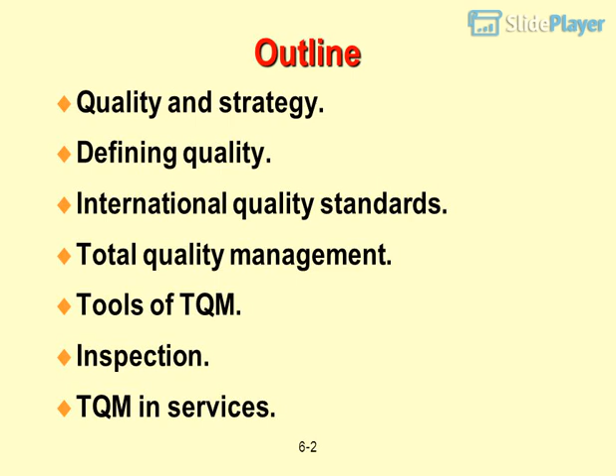International Quality Standards, Total Quality Management, Tools of TQM, Inspection, TQM in Services.

Reduced costs come from increased productivity, lower rework and scrap costs, and lower warranty costs.

This slide not only looks at the impact of quality on productivity, it also enables you to begin a discussion as to the meaning of quality, or perhaps the differing meanings among different people. To many people, the notion of high quality carries with it the assumption of high price. This slide provides an initial point to challenge that assumption.

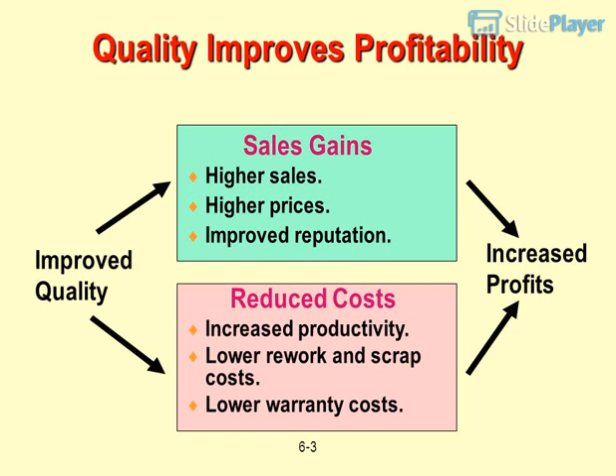Definitions of quality: totality of features and characteristics that bears on a product or service's ability to satisfy customer needs, according to the American Society for Quality. User-based: what the consumer says it is.

Manufacturing-based: degree to which a product conforms to design specification. Once you have introduced these definitions of quality, ask students to provide examples of products that use them.

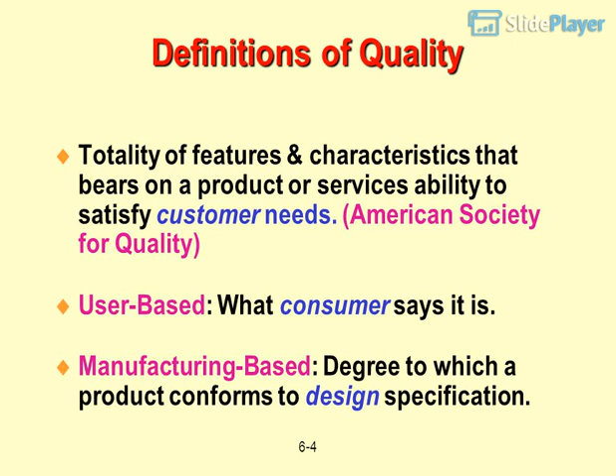Dimensions of quality for goods: operation or performance, reliability, durability, conformance, serviceability, appearance to senses.

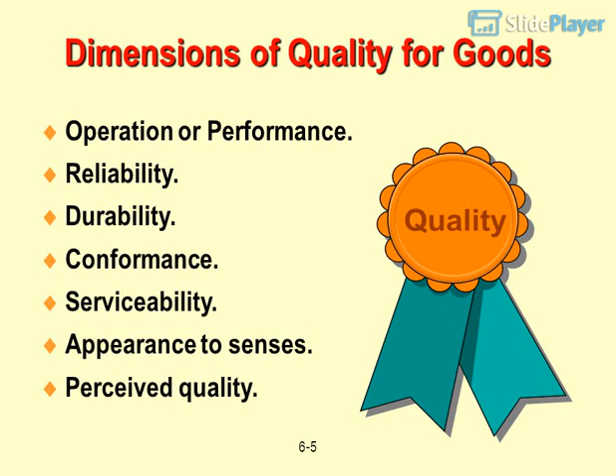Perceived quality. It may be most helpful to provide, or ask your students to provide, examples of products for which the notion of quality is based upon one or more of the dimensions listed.

Implications of quality: company reputation, real or perceived. Product liability, where large dollar amounts can be awarded. Global implications, since company quality affects national image.

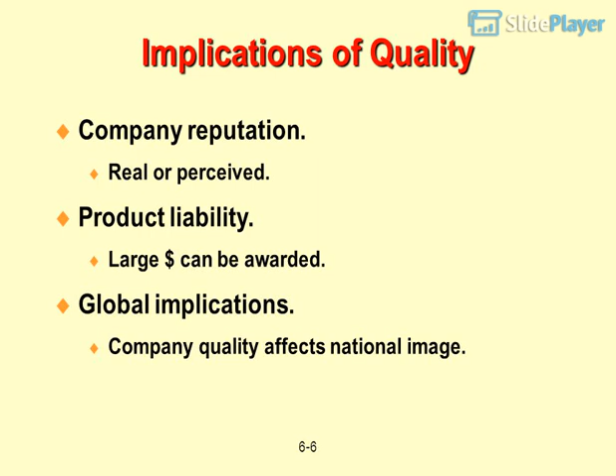International quality standards: ISO 9000 series, Europe/EC, common quality standards for products sold in Europe, even if made in the US.

ISO 14000 series, Europe/EC, standards for recycling, labeling, etc.

One of the most important points to be made from this slide is that quality standards are now international. Students might be asked to explain the benefits of international as opposed to national standards. They might also be asked to consider the limitations we would face if there were no such standards. The problems to be encountered in developing international standards also make for good discussion.

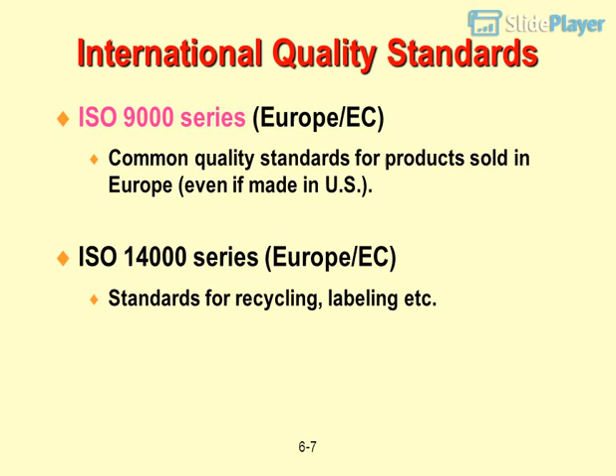Note to your students that Crosby has great reservations about the standard and the procedures for building an effective quality program.

Costs of quality: prevention costs, 5 to 10%, to prevent failures. Appraisal costs, 15 to 40%, to evaluate products. Failure costs, 50 to 80%.

Internal failure costs are defective parts or services discovered in-house. External failure costs are defective parts or services discovered by the customer. Most organizations do not know the cost of poor quality.

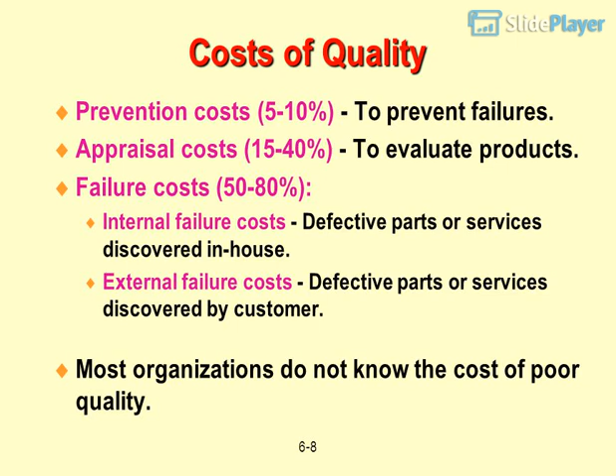Costs of quality: internal failure costs include scrap and rework, downtime, safety stock inventory, and overtime. External failure costs include complaint handling and replacement, warranties, liability, and loss of goodwill.

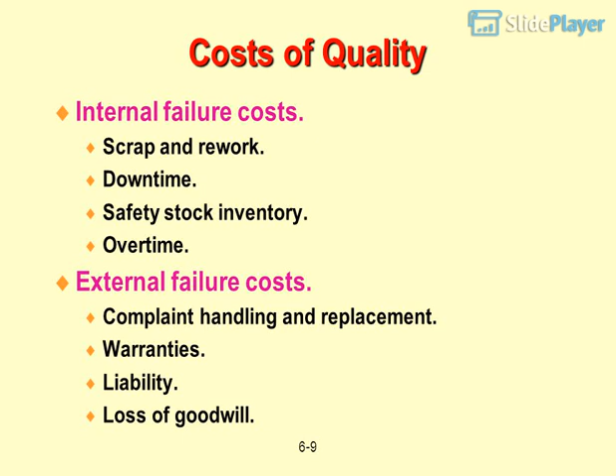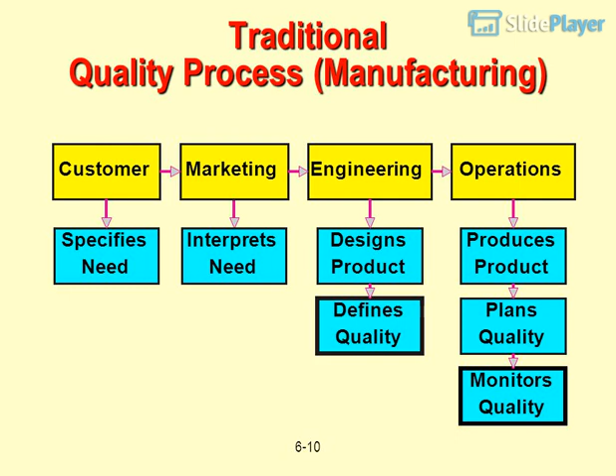Defines, plans. Students might be asked what problems they would foresee in implementing this process. Quality is monitored throughout. This leads into TQM, Total Quality Management.

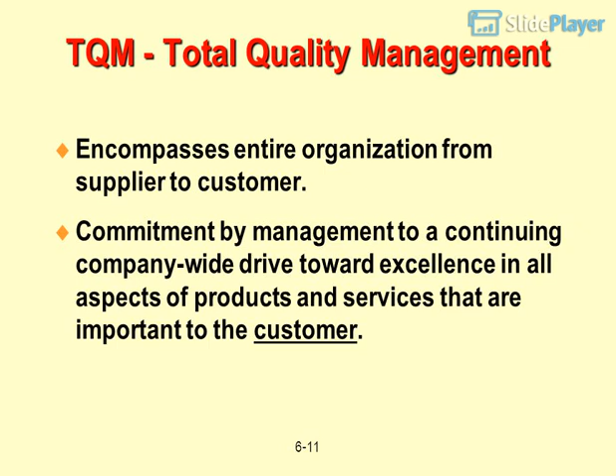TQM encompasses the entire organization from supplier to customer. It is a commitment by management to a continuing company-wide drive toward excellence in all aspects of products and services that are important to the customer. A point to be made here is that TQM is not a program but a philosophy.

Three key figures: W. Edwards Deming, Joseph Juran, Philip Crosby. Management and all employees have a responsibility for quality. Deming's 14 points led to the Deming Prize in Japan.

Joseph Juran focused on the customer and continuous improvement in teams. Philip Crosby argued that quality is free, and that the cost of poor quality is underestimated.

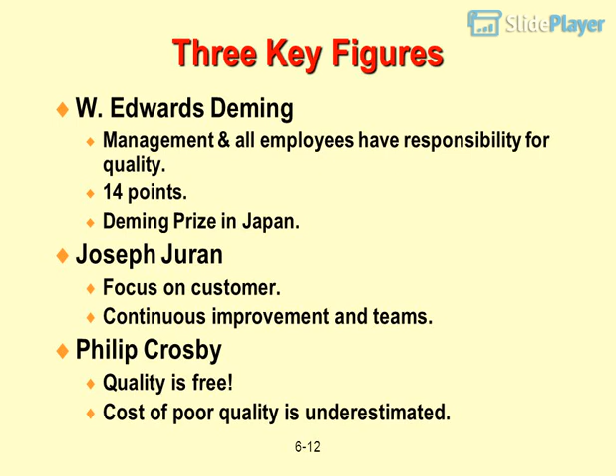If they raise this issue, ask them to consider jobs they have held. Were these points emphasized or implemented by their employers? If not, why not? This part of the discussion can be used to raise again the issue that proper approaches to quality are not programs, with limited involvement and finite duration, but rather philosophies which must become ingrained throughout the organization. Deming's points create consistency of purpose across the organization.

If not, why not? This part of the discussion can be used to raise again the issue that proper approaches to quality are not programs, with limited involvement and finite duration, but rather philosophies which must become ingrained throughout the organization. Malcolm Baldrige National Quality Award.

Established in 1988 by the U.S. government to promote TQM practices. Quality improvement programs are essential to the well-being of our economy and our ability to compete globally.

Criteria include senior executive leadership, strategic planning, management of process quality, quality results, and customer satisfaction. You might make the point that companies actually do consider this a prestigious award. For further information, visit the website

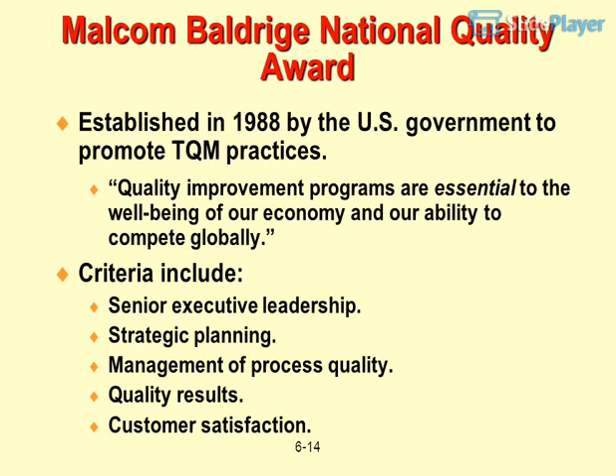http://www.quality.nist.gov. Malcolm Baldrige National Quality Award, Guidelines. It is crucial to have management understanding of the factory floor, worker involvement in quality, and emphasis on statistical process control. Quality improvement programs must be management-led and customer-oriented, and this may require fundamental changes in the way companies and agencies do business.

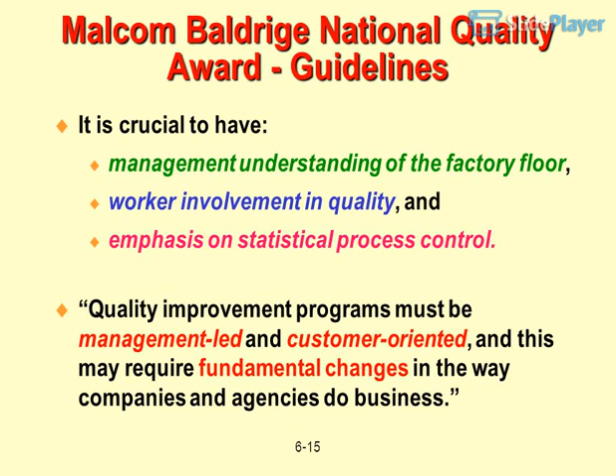You might make the point that companies actually do consider this a prestigious award. For further information, visit the website http://www.quality.nist.gov. Concepts of TQM. Top management has primary responsibility.

Focus on customer. Continuous improvement. Employee empowerment. Benchmarking. Knowledge of tools for TQM. This slide simply introduces concepts of TQM. These concepts are expanded upon in subsequent slides.

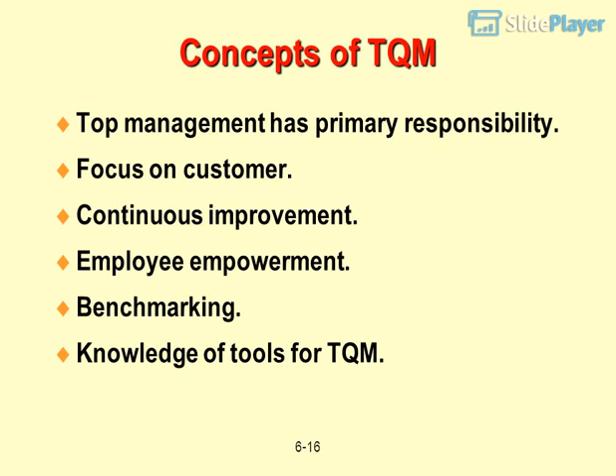Continuous improvement. Continuously improve process and customer satisfaction. Involve all operations and work units. Other names include Kaizen (Japanese), zero defects,

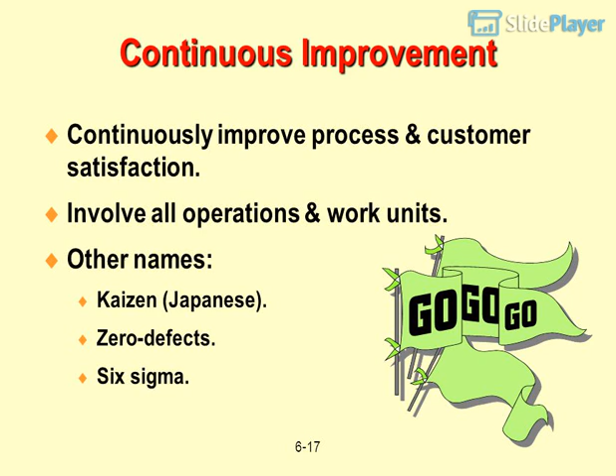Six Sigma. Students may have a number of questions with respect to the notion of continuous improvement. Why do we need continuous improvement? Why can't we do it right the first time? Doesn't implementation of continuous improvement introduce a certain instability? Are we never done?

Employee empowerment. Involve employees in product and process improvements. 85% of quality problems are due to process and material, not employees. Techniques include supporting workers so workers can solve quality problems.

Let workers make decisions. Train workers. Provide tools for improved quality. Build teams and quality circles.

If you have not done so already, you might at this point discuss why employee empowerment works. Consider the role of information technology in enabling employee empowerment, and the role of information technology in making employee empowerment a requirement.

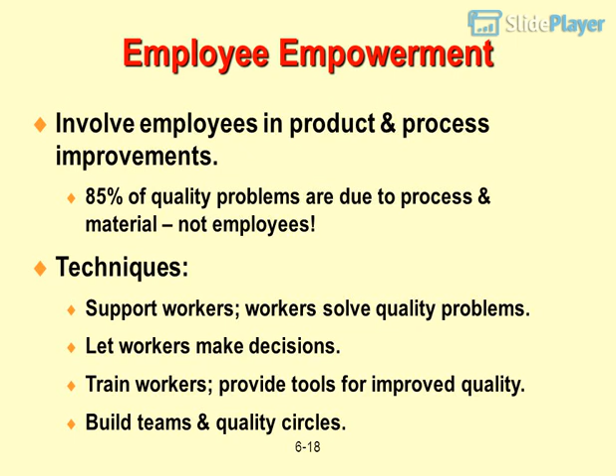Benchmarking. Selecting best practices to use as a standard, or target, for performance. Determine what to benchmark. Consider leading organizations in similar areas. Collect and analyze benchmarking information.

Use quantitative measures of performance. Take action to match or exceed the benchmark. Ask students to identify firms which they believe could serve as benchmarks.

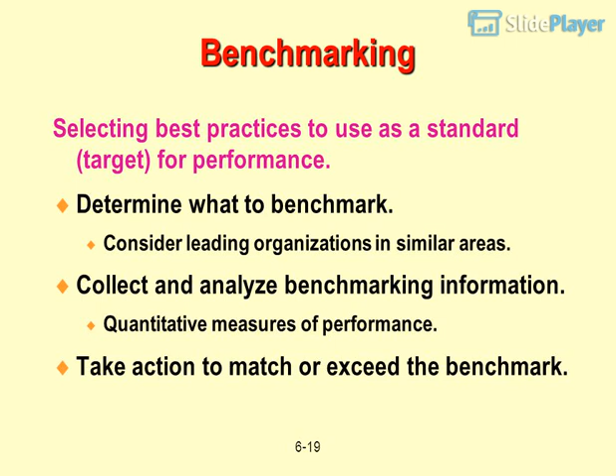If students are unable to identify any firms, ask them to identify a college or university whose registration system or housing selection system could serve as a benchmark. Most students have enough knowledge of, or friends at, other colleges and universities so as to be able to respond to this question. Tools for TQM: Quality Function Deployment, QFD.

Taguchi Techniques. Cause and effect diagrams. Pareto Charts. Statistical process control. Poka-yoke. This slide simply enables you to introduce the tools of TQM. Particular tools are elaborated upon in subsequent slides.

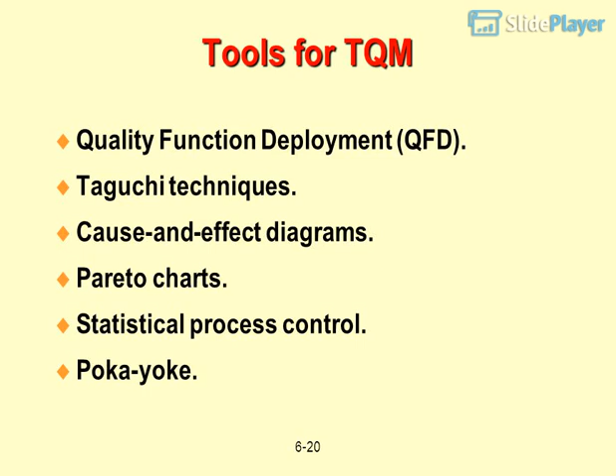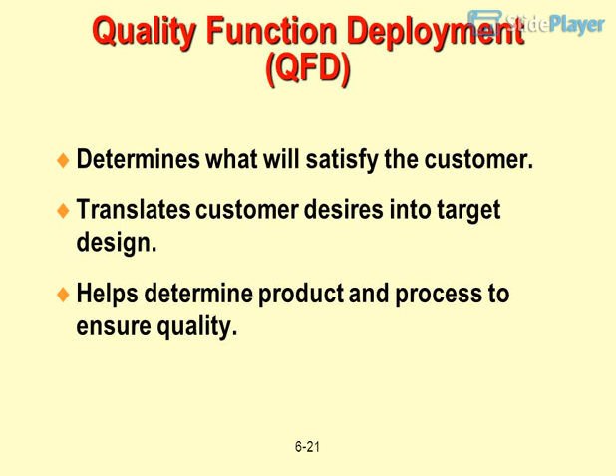Quality Function Deployment, QFD. Determines what will satisfy the customer. Translates customer desires into target design. Helps determine product and process to ensure quality.

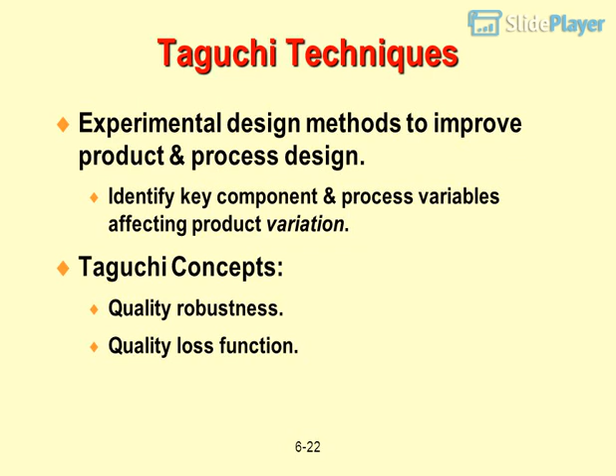Taguchi Techniques: experimental design methods to improve product and process design. Identify key component and process variables affecting product variation. Taguchi concepts include quality robustness and quality loss function.

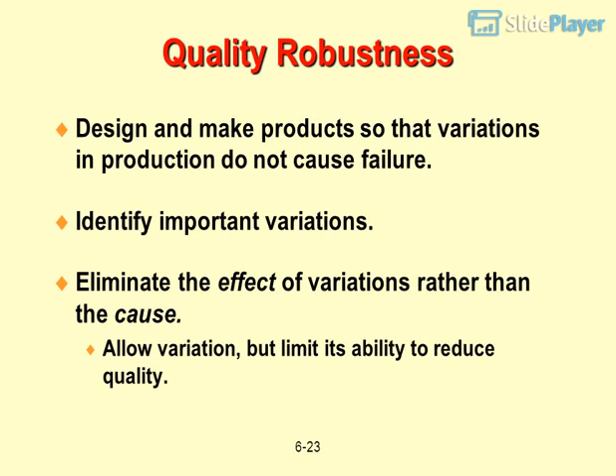Quality robustness: design and make products so that variations in production do not cause failure. Identify important variations. Eliminate the effect of variations rather than the cause. Allow variation, but limit its ability to reduce quality.

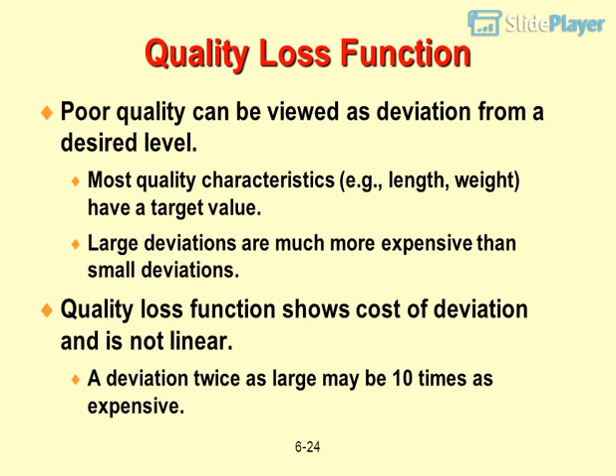One question to pose to your students: of what value is the notion of a social cost? How might a manager use this in decision-making? Cause and effect diagram.

Used to find problem sources and solutions. Other names include fishbone diagram and Ishikawa diagram. Steps: identify the problem to correct, draw main causes for the problem as bones, and ask what could have caused problems in these areas.

Repeat for each sub-area. This slide introduces the cause and effect diagram. The next several slides show the development of a simple example. If time is available, it would be helpful to ask students to develop their own examples.

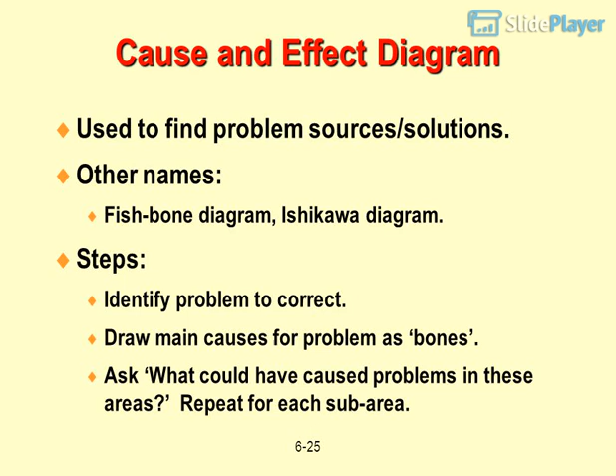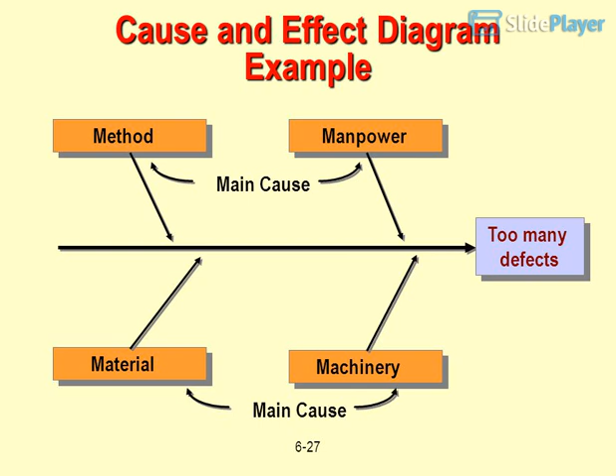Cause and effect diagram example: too many defects is the problem. Main causes include method, manpower, material, and machinery.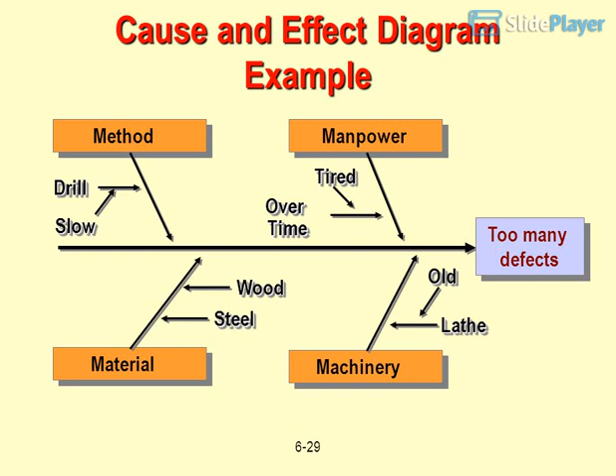Method, manpower: tired, old, slow. Drill, overtime, steel, wood, lathe. Too many defects. Material, machinery.

This slide introduces the cause and effect diagram. The next several slides show the development of a simple example. If time is available, it would be helpful to ask students to develop their own examples.

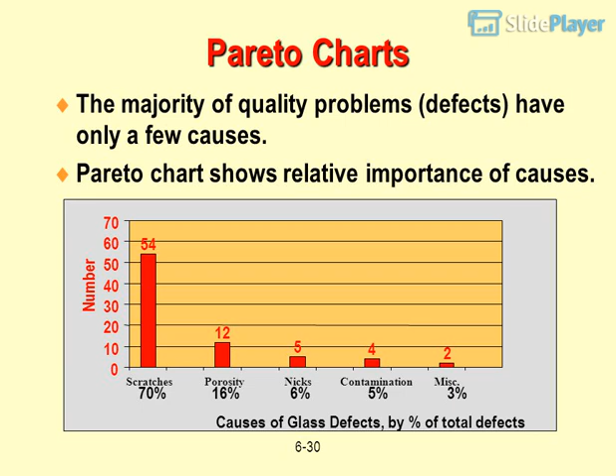Statistical Process Control, SPC, uses statistics and control charts to identify when to adjust a process. It involves creating standards with upper and lower limits, measuring sample output such as mean weight, and taking corrective action if necessary. This is done while the product is being produced.

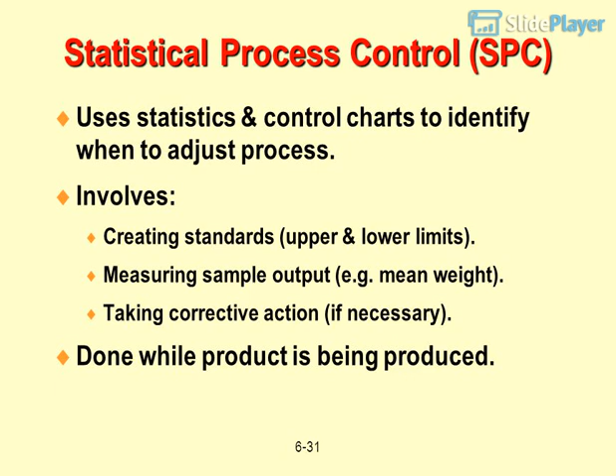This slide introduces the process of statistical process control. Slides illustrating the mechanics will be found in the presentation for Supplement 4S. At some point, you may wish to illustrate or discuss the connection between statistical process control and the target-based conformance quality control discussed earlier.

Inspection: examine items to see if they are good or defective. It detects defective products but does not correct deficiencies in the process or product. Key issues include what to inspect and when and where to inspect.

This slide introduces the concept of inspection. At this point, one should probably stress the role of inspection in the overall quality control process, since some students seem to have the notion that inspection is quality control.

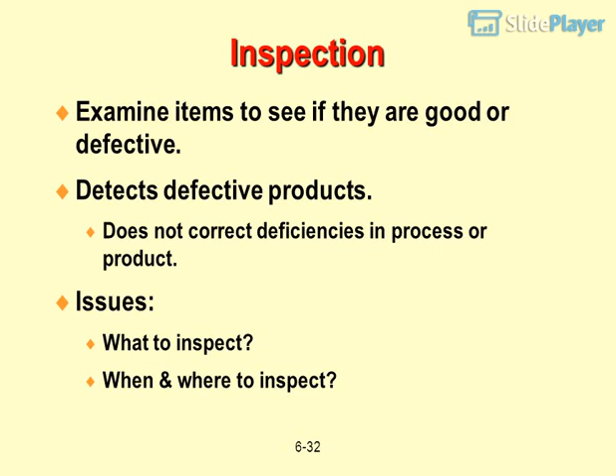When and where to inspect: at the supplier's plant while the supplier is producing, before shipping to your facility, at your facility upon receipt of goods from the supplier, before costly or irreversible processes, when production or service is complete, and at the point of customer contact.

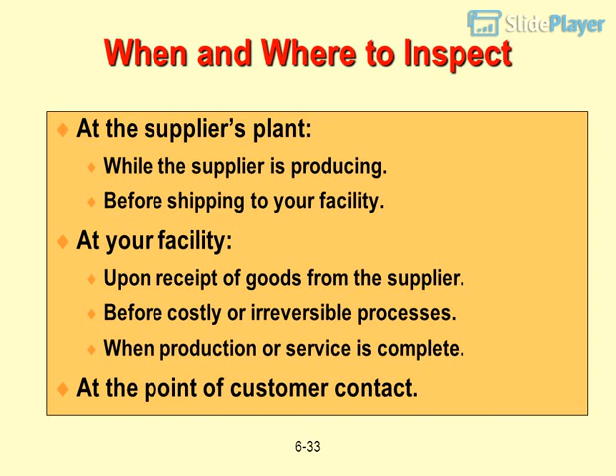This slide can be used to frame a discussion about when to inspect. If your students have documented an actual production process from a local business, one of these documented processes can serve as an example. Topic: Inspection: Richey International's Spies.

How do limousine services and luxury hotels maintain quality? They inspect. But when the product is one-on-one service, largely dependent on personal behavior, how do you inspect? You hire spies - Richey International is the spy.

National Executive Service, an international limousine service, along with Preferred Hotels and Resorts Worldwide and Intercontinental Hotels, have all hired Richey to do quality evaluations via spying. Richey employees posing as customers perform the inspections.

However, even then, management must have established what the customer expects and the specific services that yield customer satisfaction. Only then do managers know where and how to inspect. Aggressive training and objective inspections reinforce behavior that will meet those customer expectations. The training is performed in-house, but Richey International performs the unannounced inspections.

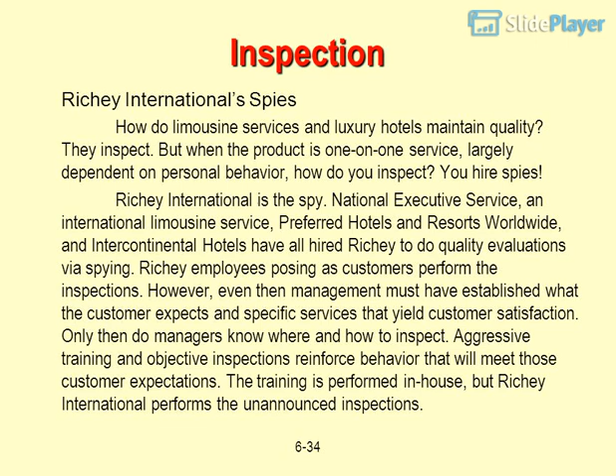This slide can be used to frame a discussion about when to inspect. If your students have documented an actual production process from a local business, one of these documented processes can serve as an example. Topic: inspection points in services.

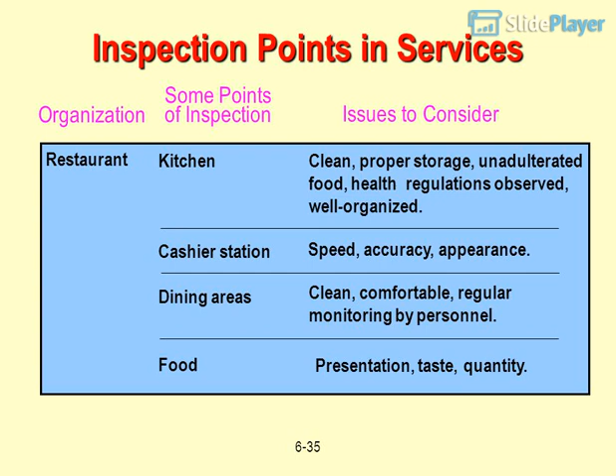Some points of inspection and issues to consider, using a restaurant as an example: kitchen, cashier station, and dining areas. For the kitchen: clean, proper storage, unadulterated food, health regulations observed, well organized. For service: speed, accuracy, appearance, clean and comfortable, with regular monitoring by personnel. For the meal itself: presentation, taste, and quantity.